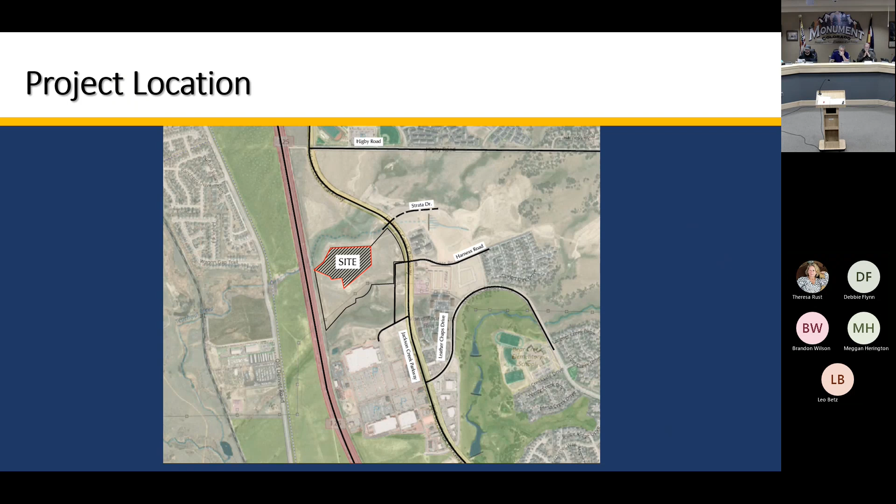It is part of the Village at Jackson Creek approved preliminary PD site plan, identified as mixed-use development with a variety of retail, employment, multifamily, and other commercial uses. Tri-View Metro District will provide both water and wastewater services for all development within Village at Jackson Creek. The existing surrounding uses include Monument Marketplace North, My Storage at Jackson Creek, and Jackson Creek Senior Living.

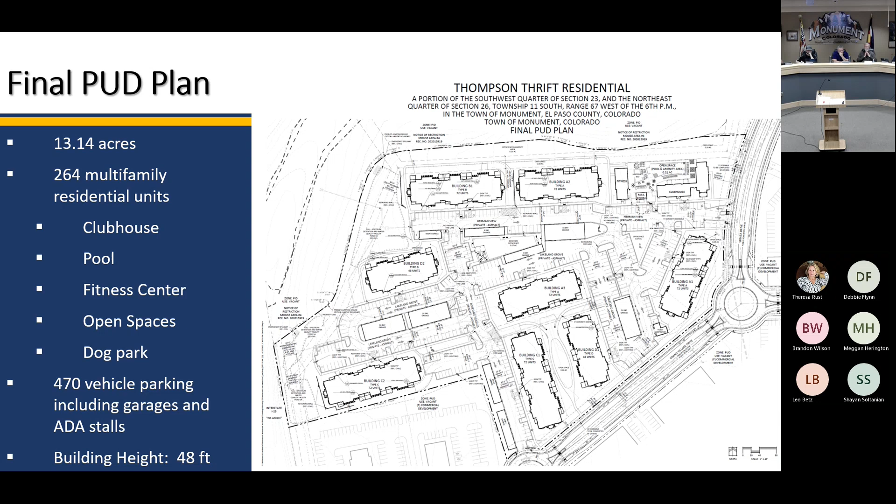The final PUD plan is 13.14 acres in size. It consists of 264 multifamily residential units, consisting of 1, 2, or 3 bedrooms. There will also be a clubhouse, pool, fitness center, open spaces, and a dog park. There'll be 470 vehicle parking spaces, including garages and ADA stalls. The building height is 48 feet.

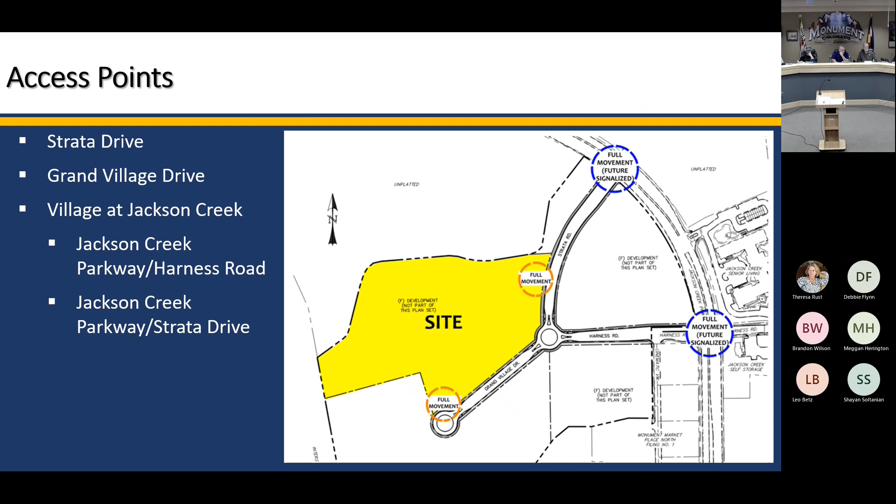The access points will be full movement at Strata Drive, and at Strata Drive and Grand Village Drive, both full movement. There'll also be a future signalized intersection at Jackson Creek Parkway and Harness Road, and Jackson Creek Parkway at Strata Drive. Once these are warranted, a signal will be put in place at these two intersections.

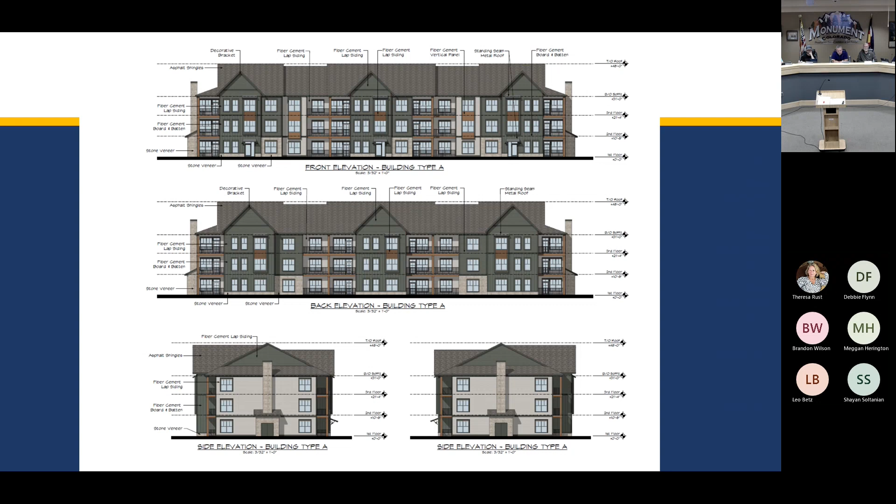In the comprehensive plan, there are a few opportunity and land uses, and Thompson Thrift will provide the live and play aspects of the live, work, and play environments for Village at Jackson Creek's mixed-use development.

Thompson Thrift will also provide common areas such as a fitness center, a pool, amenity areas, dog park, and open spaces within their development.

There'll also be a diverse mix of retail, employment, multifamily, and other commercial uses in the approved preliminary PD plan, providing a wide variety of development options that meet the changing needs of the community. Thompson Thrift falls within the multifamily residential use.

There will also be amenities for transportation such as sidewalks and bike lanes. Thompson Thrift will provide soft surface trails and sidewalks throughout their development to incorporate our trail system that connects to other trail systems within our town. There'll be separated walking and biking paths provided by Village at Jackson Creek, and Thompson Thrift will provide soft surface trails and sidewalks throughout the development under this transportation policy.

Staff recommends approval of the Thompson Thrift Residential Final PUD Plan based on the findings that the proposed final PUD plan is in conformance with the review and approval criteria of a final PUD plan as outlined in section 18.03460D, which is in front of you tonight, of the Town of Monument's Land Development Code.

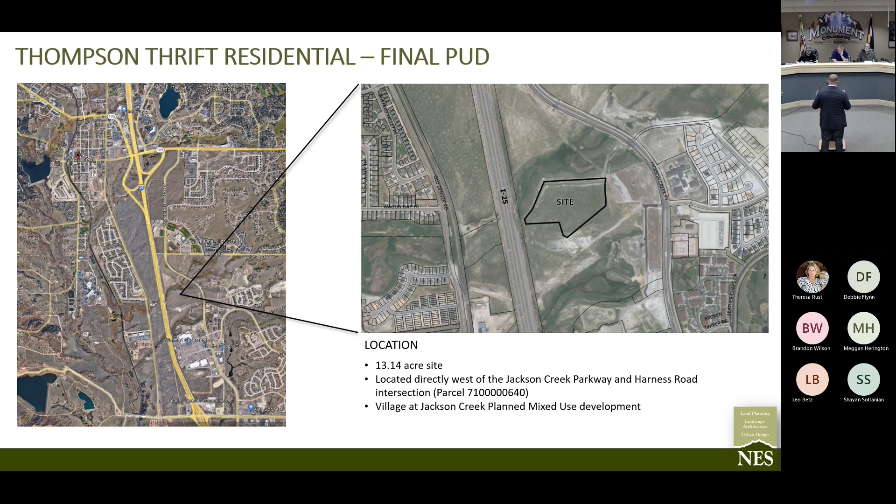This project, for a little bit of background, was zoned PUD as part of that preliminary PD site plan, which was a 46.97 acre mixed-use development and incorporated retail, employment, commercial, and residential uses.

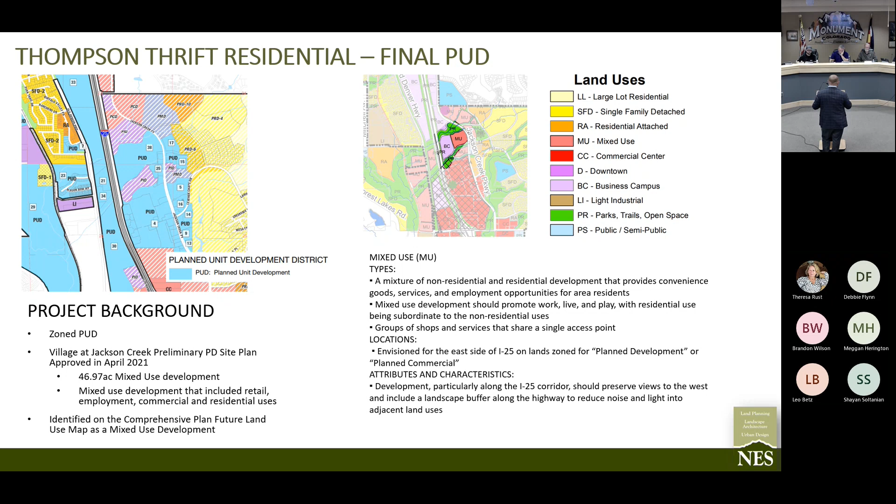This site is identified on the comprehensive plan as a mixed-use development, which specifically looks at a mixture of non-residential and residential development for uses such as convenience goods, services, and employment opportunities for the residents. These mixed-use land uses are identified as part of the east side of I-25, as noted in the comprehensive plan.

These past approvals with the PD site plan for the Village at Jackson Creek mixed-use development specifically identified those three uses that we discussed and a density of up to 20 DUs per acre.

As Debbie had mentioned, there are access improvements along Harness and Strata. Strata was previously Cloverleaf Drive. These roadway improvements are looking to be built by the master developer, maintained by TriView, and then there'll be metro districts which maintain the streetscape, covering some of those amenities Debbie was talking about for the increased pedestrian access.

With that preliminary PD site plan, there were established development guidelines that dictated setbacks, landscaping, signage, and overall landscape or development guidelines. As mentioned, this site is a 264 unit apartment project in the Village at Jackson Creek development.

A mix of 1, 2, and 3 bedroom units along with a variety of amenity spaces. Currently, the site is vacant, and the building height that we're proposing with this application today is 48 feet.

With the Village at Jackson Creek development, there were 2 building heights established based on the proximity to I-25. So there was a zone 1 and a zone 2. Everything in zone 1 was within 600 feet of I-25, had a maximum building height of 75 feet, and everything outside of the 600 feet had a 50 foot building height.

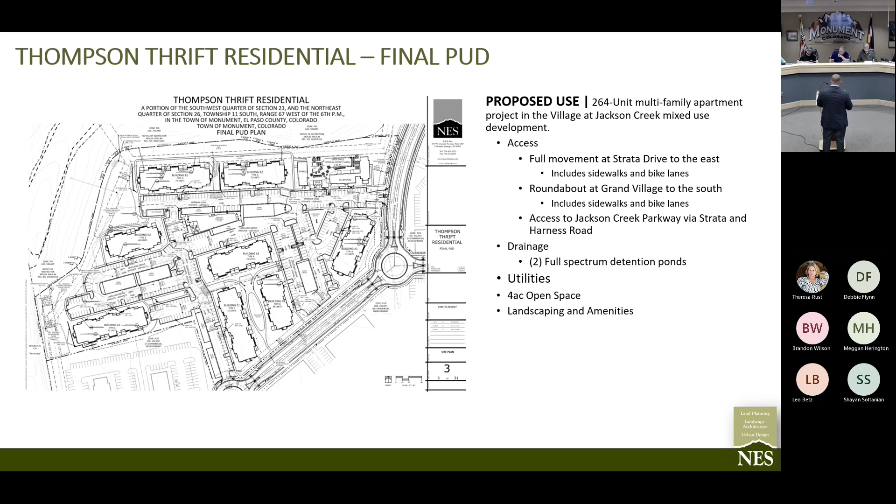Watermark Residential, as mentioned, is a Thompson Thrift company, a Class A multifamily developer. They put specific emphasis on upgraded interiors, energy efficiency, and amenitization in their properties. As part of their recent efforts, they've even increased their focus on post-COVID design, leading to an emphasis on flexible and dynamic spaces that improve outdoor amenities and community spaces, as you'll see in the provided application.

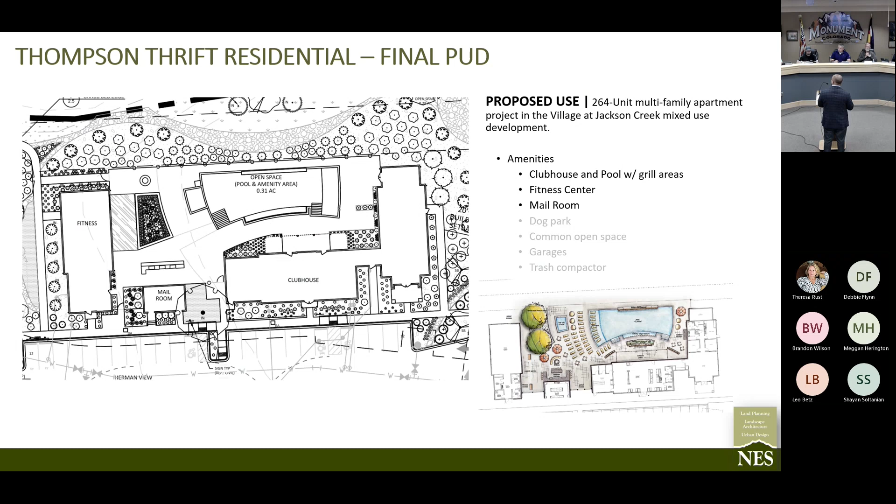Some of the amenities proposed with the development include a clubhouse with a pool and grill areas, fitness center, dedicated mailroom, and a community dog park that's centralized in the development and surrounded by some garages.

A common open space closer to Grand Village. And then, as mentioned, there are community garages and a community trash enclosure with a screened enclosure.

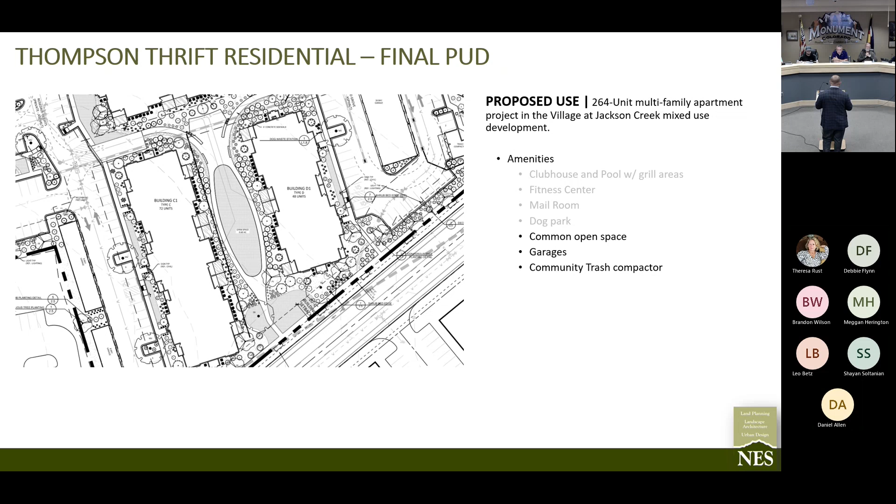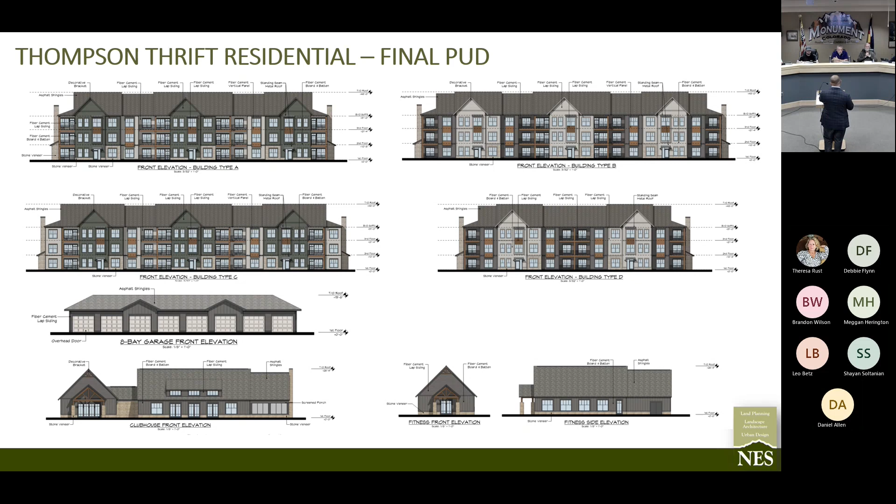With this application, there are 4 building types being proposed with this development. Each of those elevations has 2 color options, option 1 and option 2, as you'll see. Along with that are the garages, clubhouse, and fitness center, which complement the aesthetic of the other architecture provided with the development.

Supportive of the policy framework, the proposed development incorporates complementary land use variety, increased opportunities for live, work, play options by providing a balance of supported housing with commercial and mixed use developments provided within the Village at Jackson Creek, added amenity improvements to add to the usable common areas that are on site and easily accessible, and improved and enhanced street sections for increased multimodal options, both with the trails internally and the improvements happening with Grand Village and Strata.

As you know, there are 9 review criteria that are part of the PUD development plan. We feel that all 9 of these criteria are met through the consistency shown with the past preliminary PD site plan, the incorporation of the variety of architectural types and styles, the quality landscape design provided throughout the development and the amenities provided on site, and the consistency with the context of the comprehensive plan envisioned for this land use pattern in this area.

With that, I will open up for any questions, and I thank you for your time today.

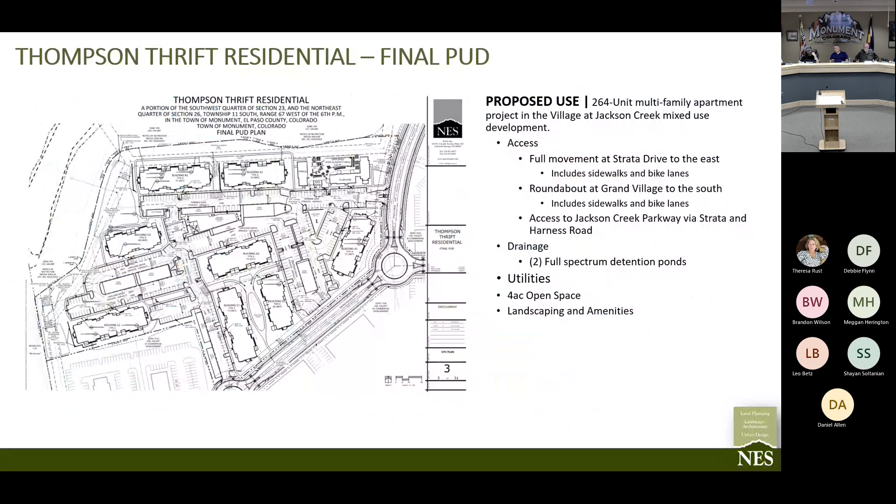Commissioner Zernico: Help me understand the full movement future signalized area. That intersection at Harness and Jackson Creek right now is a disaster, an accident waiting to happen, and continuing further toward Baptist as well. You may not be able to answer this, since traffic studies have to be conducted first to determine when a signal is warranted. But we're talking 470 parking spaces, so take 20% of that and it increases traffic quite a bit coming out of that Harness intersection.

We do have our traffic engineer here, Jeff Hodgson. I can give you a broad perspective: the current traffic report Jeff put together for Harness showed the signal warrants weren't met to put in that signal. But once those warrants are met as development moves forward, that signal will come on board. Currently it doesn't meet the warrants, but I believe once the signal goes in, it will have a level of service of A or B once those do come in.

Does that help, or do you want more on the discussion? I can have Jeff give you the details of the numbers if that'll help, but the broad perspective is those warrants haven't been met yet with the current development improvements. Each time a PD site plan comes in, we'll have to show whether we've hit those triggers, and whether a signal will be required. I believe he's right behind you, if you'd like to answer, sir.

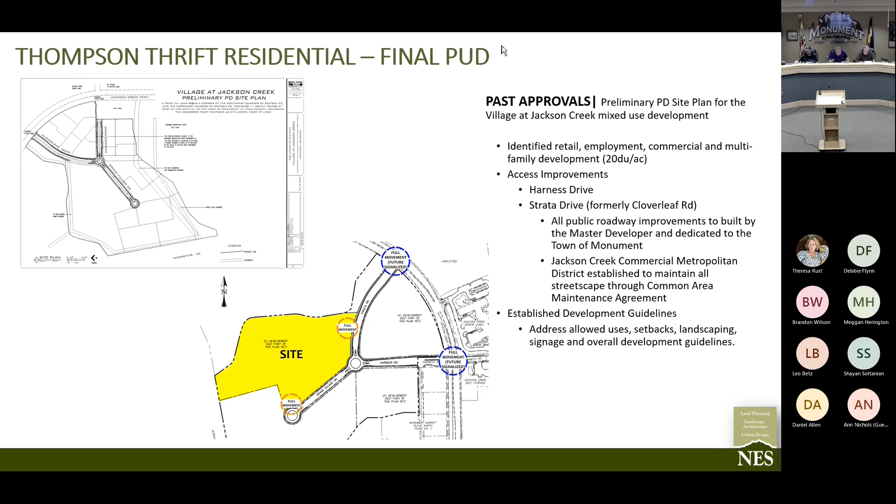Any other comments, planning commissioners? At this time, we'd like to go ahead and motion to vote. Are there any motions to approve the Thompson Thrift Residential Final PUD plans as prescribed?

Vice Chairman Trujillo, No. Commissioner Hours, Yes. Commissioner Zunico, Yes. Commissioner Egley, No. Commissioner Peck, Yes. Commissioner Collins, Yes. So the vote is 4-2 and it passes.

Very well, thank you. At this time, we're going to go ahead and move on to public hearings for recommendations for the Village at Jackson Creek filing number 1 final plats. Staff, I defer to you for the presentation.

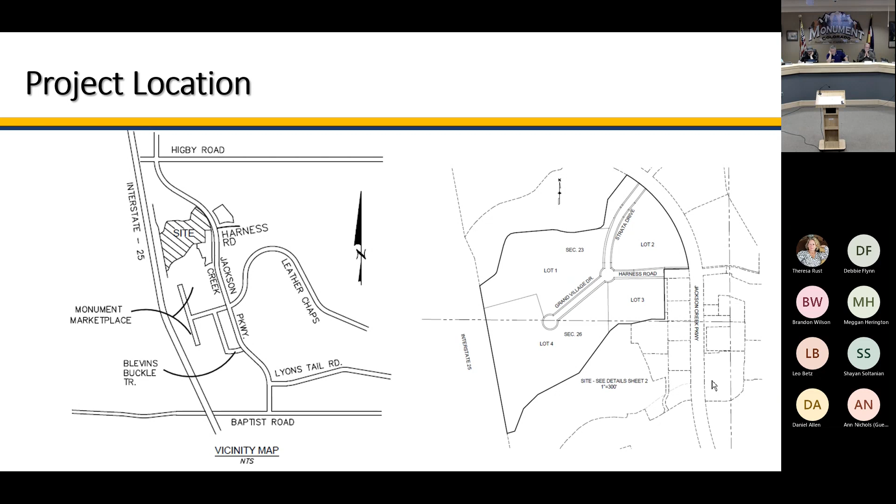Good evening, this is Village at Jackson Creek filing number 1. The project is west of Jackson Creek Parkway off of Harness and Strata Drive. The plat is 46.973 acres in size. Village at Jackson Creek preliminary PD site plan and rezone was approved by the Board of Trustees on April 5th, 2021. There will be 4 lots, 3 tracts, and 3 streets.

The streets will be Strata Drive, Harness Road, and Grand Village Drive. All streets will be owned by the Town of Monument and maintained by Triview Metro District. The lots range in size from 4.364 acres to 17.045 acres. Tract A is dedicated for open space, utilities, and drainage, and will be owned and maintained by Triview Metro District. Tracts B and C are designated as streetscape tracts, and will be owned and maintained by Jackson Creek Commercial Metro District. Triview Metro District will provide water and wastewater services.

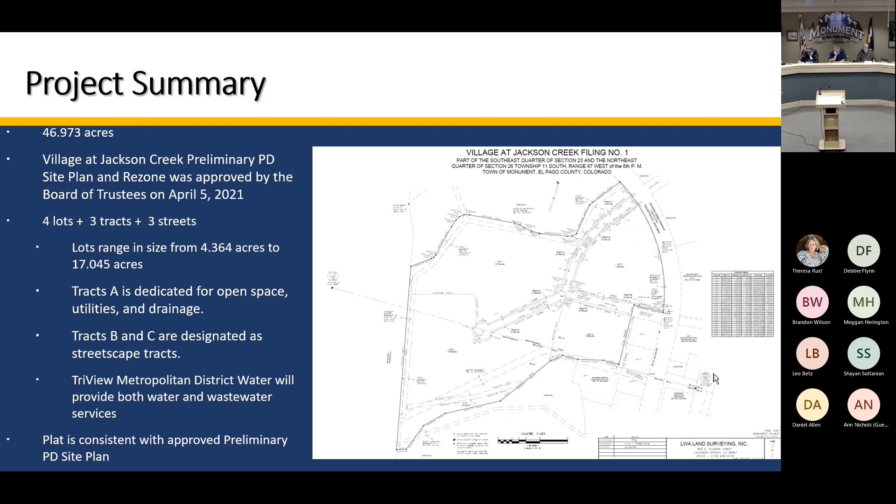The plat is consistent with the preliminary PD site plan, and staff recommends approval of Village at Jackson Creek filing number 1 final plat based on the findings that the proposed final plat is in conformance with the review and approval criteria of a final plat as outlined in section 18.02-260C of the Town of Monuments Land Development Code, which you have in front of you tonight. Brett Benke with CSI is here to answer any questions.

Other comments? None? Lot 1 has constraints, bounded by Strata. The other 2 lots, lot 3 is kind of separated by a grade change, and we likely see at lot 3 some sort of retail or office use there, and just leave lot 4 as a lot. So all of these will likely come back before you.

Thank you, sir. At this time, the public comments are open. Those individuals that are online, again, I remind you to go ahead and raise your hand if you have any questions. Inside the room here, first off, if there's anybody that needs to make a comment, please go ahead and step forward.

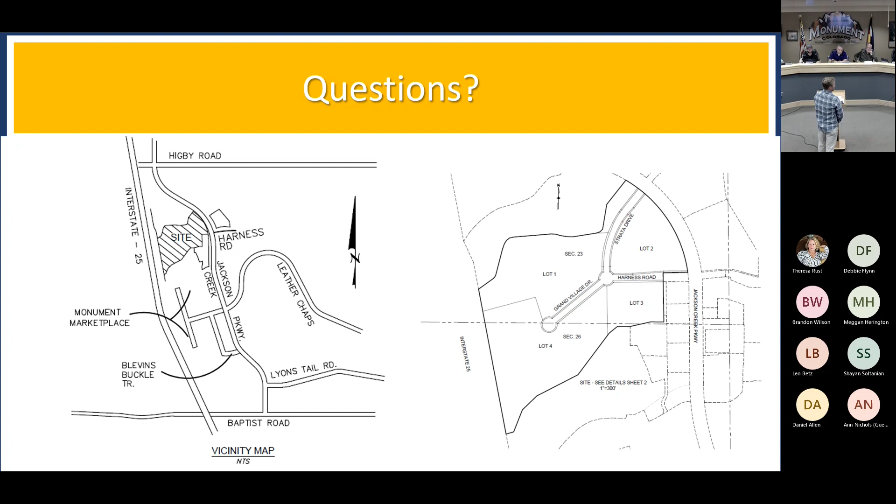At the family residence, site is developed residential, you can't have a 17-acre site. So, yes, thank you for pointing out the construction defect issue is the challenge for developers to build condominiums. After 8 years, they'll be converted once construction defect liability goes away. But until that changes, I don't know what to say about it.

Thank you, sir. At this time, we'll close the public comments, and we'll go ahead and defer to the commissioners for questions and comments. Commissioners, any questions?

This is Commissioner Egley. For Debbie, is there any constraint on the developer coming back in the future and looking at Lot 4 and saying, I want to go ahead and cut that in half and have multifamily residential on a portion of it? They could come back and cut that in half for whatever use possible, but staff would have to review it and approve it to see if it meets the standards for the PD site plan that was approved. Thank you.

Question for staff as well. Inside the whole plan for Jackson Creek, the village at Jackson Creek specifically, when we said multi-use, that was for the whole facility, correct? Correct. Thank you.

Commissioners, any other questions? Commissioner Hours, this is for staff. Any concerns about restrictions on what can go on here — is that not appropriate at this point, correct?

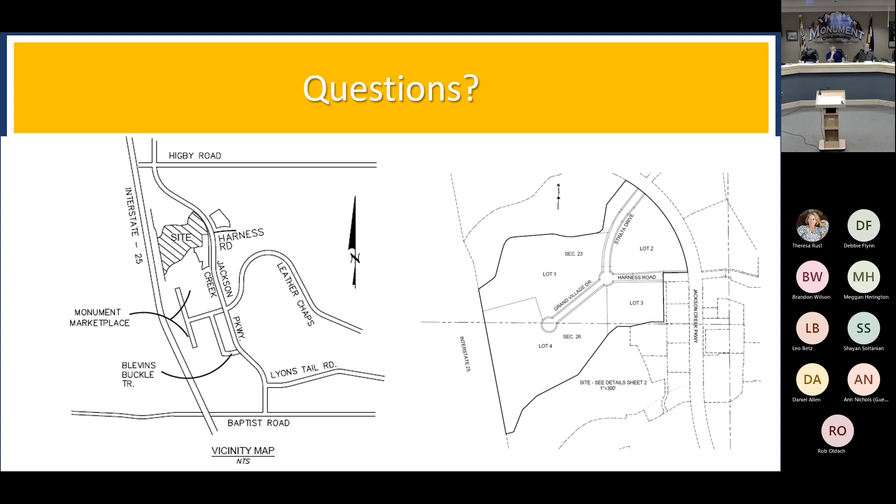Questions? So what's the definition of multi-housing? We don't have that definition. But again, the question is, as we continue to kick this can down the road, it's a forcing effort to identify what is that answer.

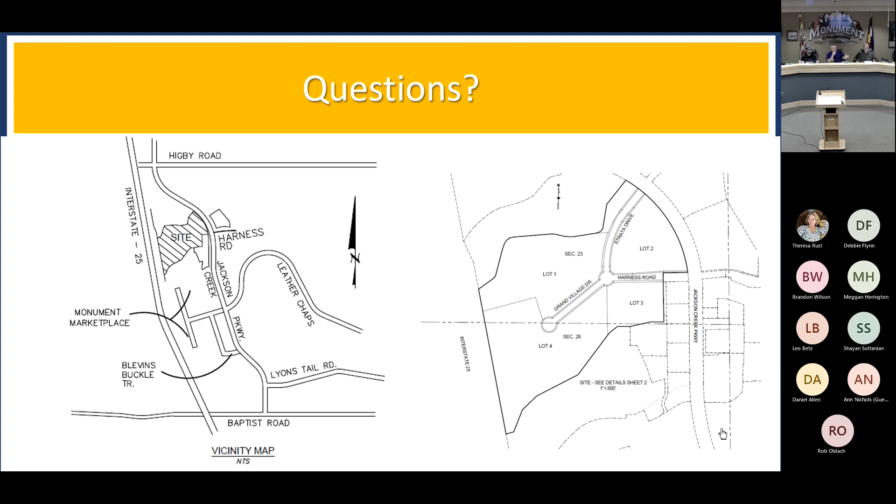I don't have that answer, and staff doesn't have that answer. Trustees don't have that answer. But now we have developers that are coming in saying, I'm going to continue to build inside our city, that we have folks that have been here for multi-generational housing, and now we're allowing the aspect of density to control our decision. I don't have the answer.

Commissioner Peck, to the staff, is that within our power to do? Since the preliminary PUD allows for this.

So a plat, a final subdivision plat, a subdivision action creates individual land. So with this action on the final plat, they're not asking or requesting to build anything. There's no site review to be had as you would with the site development plan. So any conditions on a final plat need to be related to the creation of lots, the creation of land itself.

The lotting pattern here is... I'm just looking at the review criteria. Lot pattern is mentioned. Lot and development patterns ensure light and air. Plat design for adequate access, adequate, safe, and efficient public improvements.

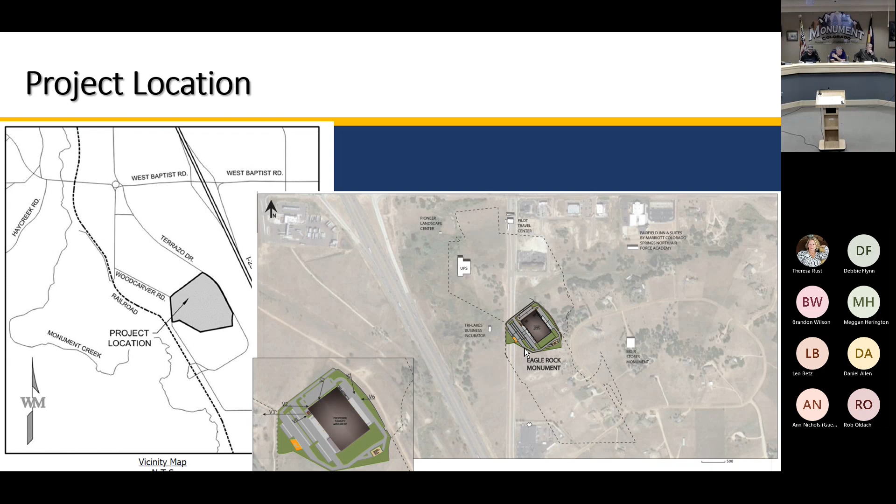It's off of the locations, odd to talk about. It's off of Woodcarver Road, but not off of Woodcarver Road. It's just on the other side of Woodcarver Road as well within the Falcon Commerce Center, and it's south of UPS. The part of Falcon Commerce Center approved of PD sketch plan identified the area to be developed as a mix of civic, industrial, institutional, medical, office, or warehouse distribution use. In this case, it's warehouse distribution use, as well as a commercial and office aspect within this project. Forest Lakes Metro District will provide both water and wastewater services for all development within Falcon Commerce Center. The existing surrounding uses include the Pilot Travel Center, Pioneer Landscape Centers, and UPS.

The project is 23.39 acres in size. The proposed use is office and beverage storage distribution. The building height is 49 feet.

Building size is 262,500 square feet with a 10,000 square foot maintenance facility, as you can see to the right of the proposed building. They will have an outdoor patio, a trail connection to the Santa Fe Trail, and they will have a variety use of parking.

Passenger parking will be 172 parking stalls. Box trucks, there will be 106 box truck stalls and 11 semi stalls.

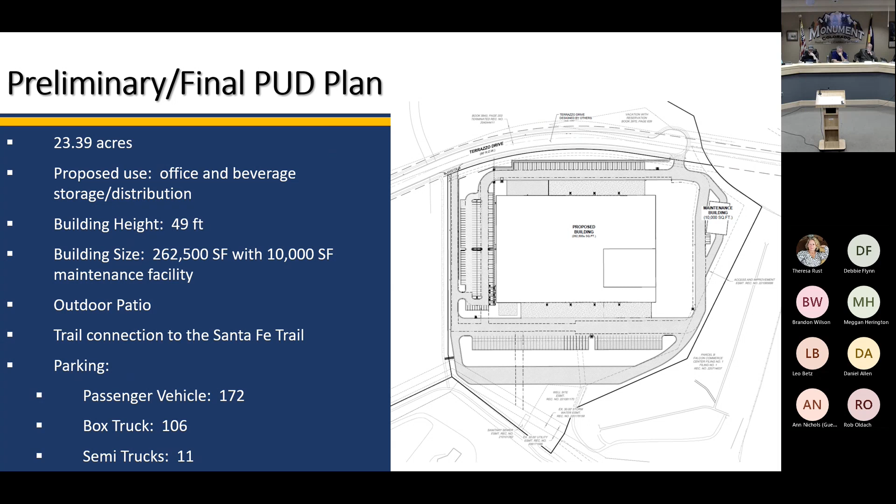Hours of operation is from 9 to 5. The outbound trucks leave the facility at 3 a.m. and return from noon to 6 p.m. The inbound trucks are scheduled by appointment from 4 a.m. to 11 a.m., and receiving operations are on Saturdays only.

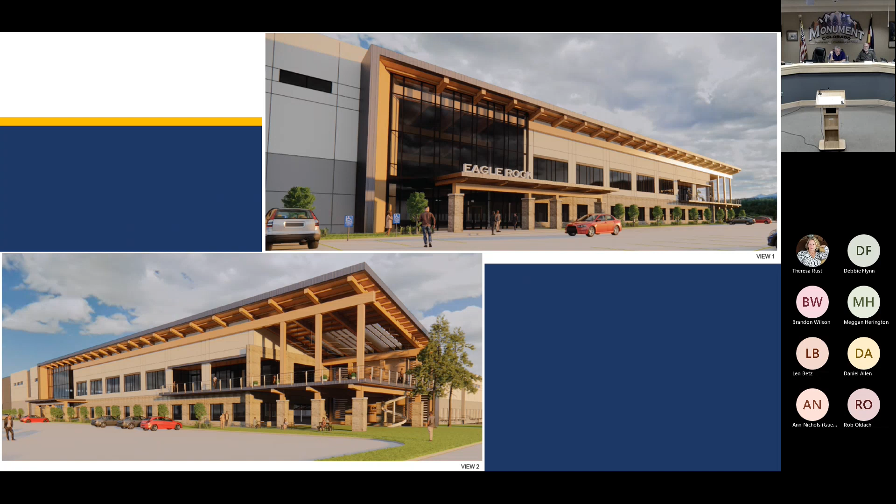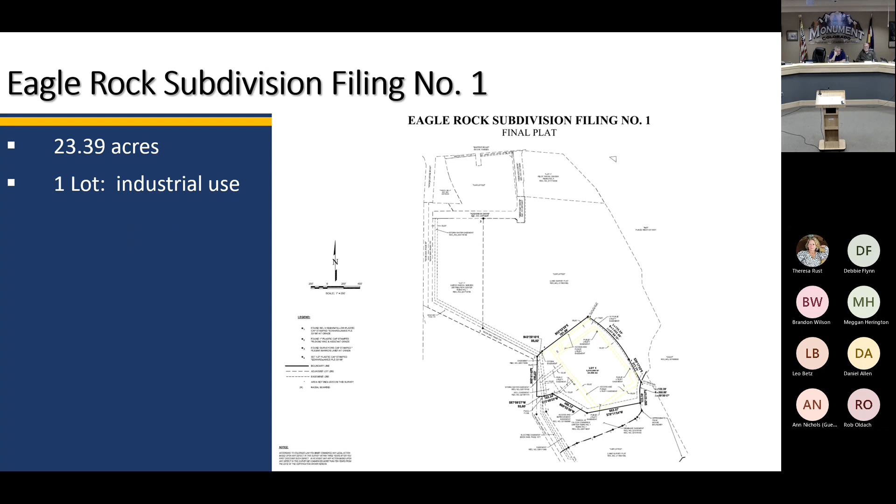Eagle Rock Subdivision filing number 1 is 1 lot. It's 23.39 acres. It will be the lot for Eagle Rock Distributing Company. And it does meet the comprehensive plan.

It has a mix of civic, industrial. The land use types will meet the changing needs of the community by providing a warehouse distribution use with an office aspect inside as well, within the mixed use development of Falcon Commerce Center.

There will also be a trail connection on the north end of the site that will eventually connect to the Santa Fe Trail.

Eagle Rock will provide about 100+ jobs to the community.

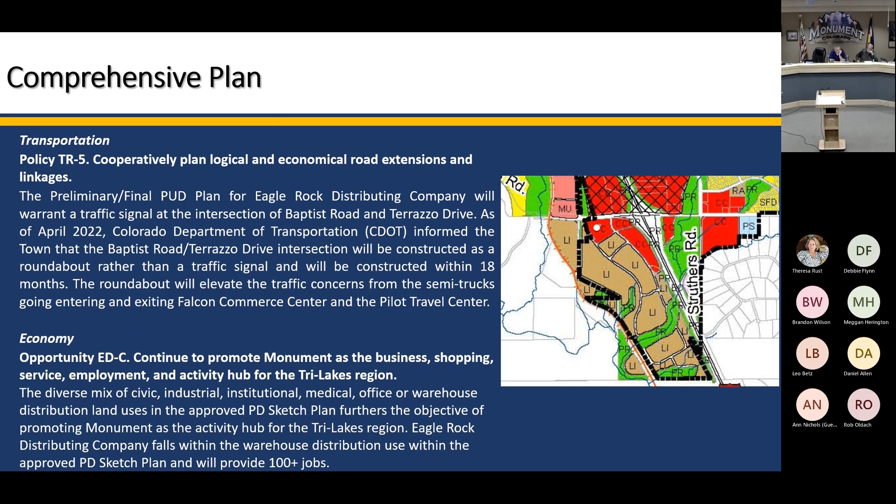Staff recommends approval of Eagle Rock Distributing Company preliminary final PUD plan in Eagle Rock Subdivision filing number 1, based on the findings that the proposed preliminary final PUD plan and final plat is in conformance with the review criteria for the preliminary final PUD plan and final plat as outlined in sections 18.03 450D and 1803 460D and 1802 260C, which is in front of you tonight within the Town of Monument's Land Development Code.

And then tonight we do have a representative from Eagle Rock that will be presenting their portion of their presentation.

At this time, do we have Eagle Rock for a presentation now? Yes, sir, please come on down. Thank you, sir.

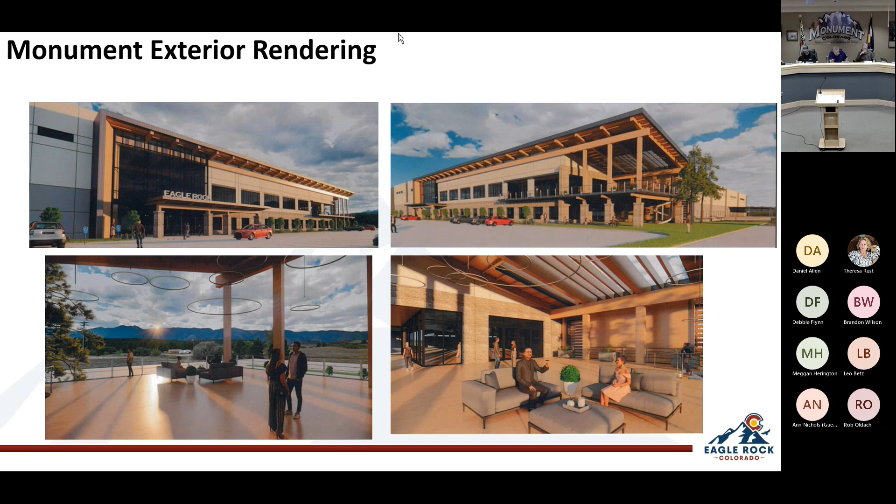Any other questions, commissioners? At this time, please request a motion to vote as specified by the applicants.

Mr. Chairman, this is Commissioner Egley. I move that the Planning Commission recommend approval of Eagle Rock Distributing Company preliminary final PUD plan and Eagle Rock subdivision filing number 1, based on the findings that the proposed preliminary final PUD plan and final plat is in conformance with the review and approval criteria as outlined in sections 18.03.450.D, 18.03.460.D, and 18.02.260.C of the Town of Monument Land Development Code.

I second. We'll take a vote at this time. Vice Chairman Trujillo, yes. Chairman, Commissioner Hours, yes. Commissioner Zernico, yes. Commissioner Egley, yes. Commissioner Peck, yes. Commissioner Collins, yes. The vote is 6-0 and passed.

Thank you, ma'am. At this time, we're going to move on to the ordinance adopting industrial design standards, definitions, and use. I defer the next presentation to staff, please.

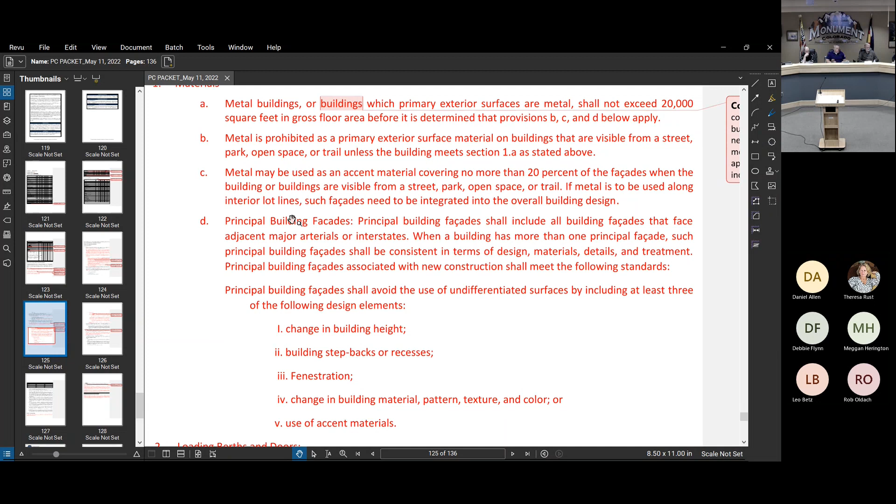Otherwise, metal is prohibited as a primary exterior surface. And then you have to have a change in building heights. Metal can only cover 20% or less of the facade. It's an accent material, and then you have to incorporate design elements: change in height, step back building, fenestration, change in building material, pattern, texture, color, accent materials.

So we're trying to have larger buildings that have good design.

Loading berths and doors. Again, I think this is another area that's been pretty well discussed. Probably no agreement on loading berths and loading doors. We're defining two types of loading doors.

An elevated truck dock would be one that serves more of a semi-truck. It's oriented towards a semi-truck or maybe even a box truck. Each building may contain a maximum of one elevated truck loading dock per 15,000 square feet of indoor building warehouse space, plus or minus 44 inches in height from finished grade. So that is a limit on those elevated truck docks.

I have 10,000 in here, and it's got a line through to 15 with a note. It started out as 10,000. We heard people in the industry saying 10,000 is the industry standard. We had some citizens that said there's examples of municipalities that have gone with a much greater square footage. 15,000 square feet was brought up by a trustee member saying we should increase it over the 10,000. That's kind of how we got to the number 15,000.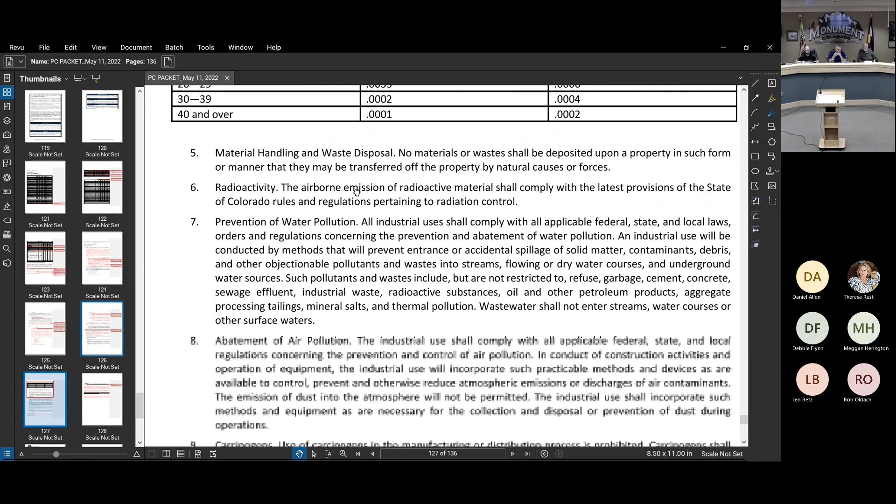And then safety, noise, vibration, radioactivity, prevention of water pollution, abatement of air pollution. All of these are already in the code currently. A lot of these are state or federally regulated. It's going to be pretty hard for the town to regulate these. Everybody kind of acknowledges that, but they're in the code. Staff was not trying to remove language that was already in the code. These are just good reminders.

And again, if there was an issue with one of these, I think we would require a request for town assistance from the proper state or federal department. But again, they're in here now. We're not removing them.

And that brings us back to words and terms. So we've gone kind of full circle. What are we thinking? The definitions I hear you say are maybe hard to find clarity. The conditions of fulfillment versus distribution, what are they? Talk about that right off the bat.